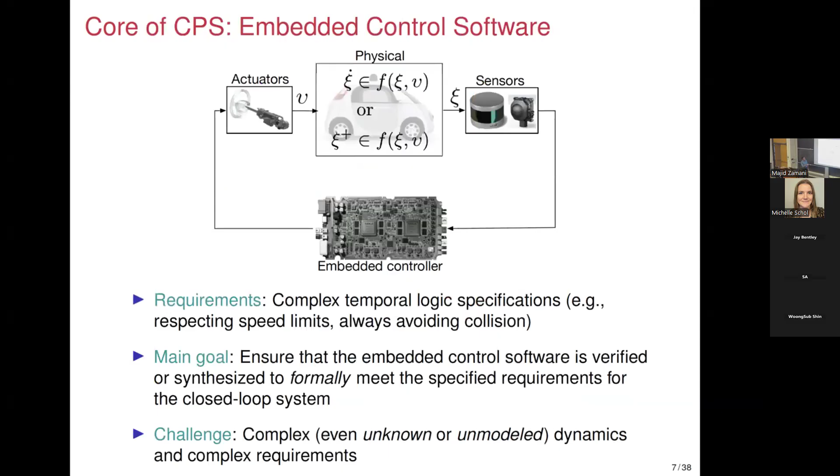Of course, for computing this so-called over-approximation of the reachable set, the whole idea in all these papers was, you have the map F, this map F here. The question is, what if you don't have it? How do you compute that object, the reachable set? Can we do it? The answer is yes, if you have some assumptions over your dynamic. By the way, there is no free lunch.

You cannot just say, I don't know anything about my system, but I also would like to provide formal guarantee. That doesn't work, right? You need to give me something. Okay, what is that? Give me some regularity property of your system. For example, it is Lipschitz continuous, right? That's enough for me. And give me some bound over that Lipschitz constant. I can use that information to actually build this finite system without knowing the model of your autonomous systems. I'm not going into the details. You can find the details in this paper.

But then you might say, what if I don't know the Lipschitz constant? That's okay. Give me nothing, right? I don't need anything. But then I don't give you 100% guarantee. I give you guarantee with some confidence, if you're okay with probabilistic guarantee. So now I say, rather than giving me the Lipschitz constant, do not give me anything. I can still build the finite representation of my autonomous systems.

But in this case, let's say I would like to design a collision avoidance software. What is my guarantee at the end of the day? I say, look, you will not collide with the obstacle with the probability of at least 99%. Of course, you can adjust the probability, 1 minus 10 to the power minus 5. If you're happy with that, then you use this method. If you want 100% guarantee, then you should give me something about your system. So it's now your call to pick which one you're happy with.

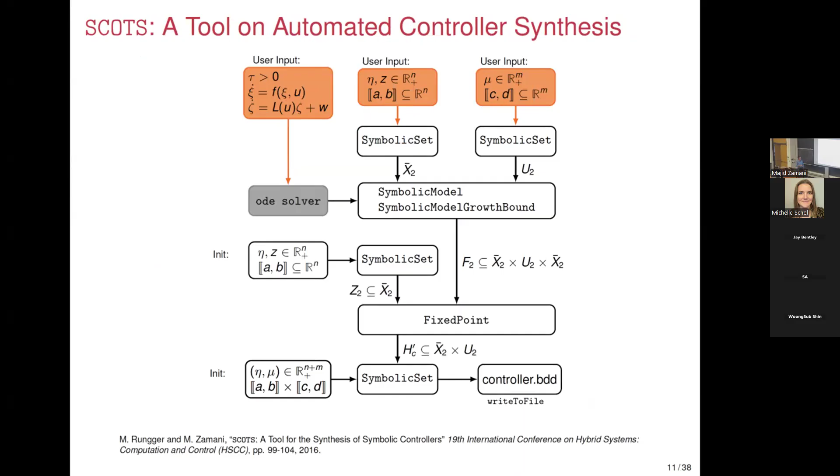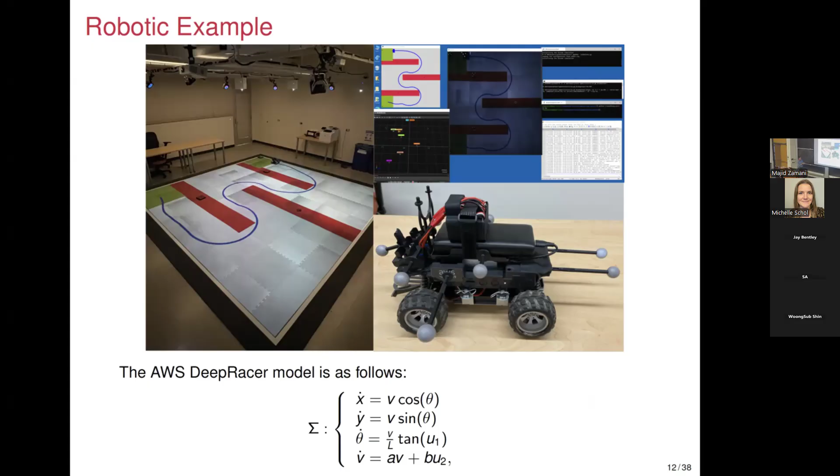So we have a tool where you can apply all these methods already, even if you don't know the map F, using data. And this is a setup we have in the lab. This is the model of this car. I'm not going to use the model for controlling the car. I'm going to use it to collect data, right? So that means I put this inside a black box. I can access it using data, but I don't use the map F explicitly.

Here, the car is supposed to go to the green region and avoid the red obstacle. And the student comes and introduces obstacles which were not introduced before. So the car is able to navigate in real time and choose the correct action.

Within one of our NSF projects, we started collaborating with Norwegian University of Science and Technology, UC Berkeley, and Hong Kong University. And they said, this is interesting. We would like to use this finite abstraction-based idea to control the docking of a surface vessel. They have a surface vessel in their lab, and they would like to use this finite abstraction, reachability based, even though we don't know the model. They wanted to apply it and see if it works. And this is the video: this vessel is supposed to avoid those obstacles, the yellow obstacle, and go somewhere there and dock.

So you see, it works as long as the systems are not very large in terms of dimensionality. We can use this machinery of computing over-approximation of reachable set, building this finite representation, designing a controller, applying the controller, and it works, even if we do not have access to a mathematical representation of the robot.

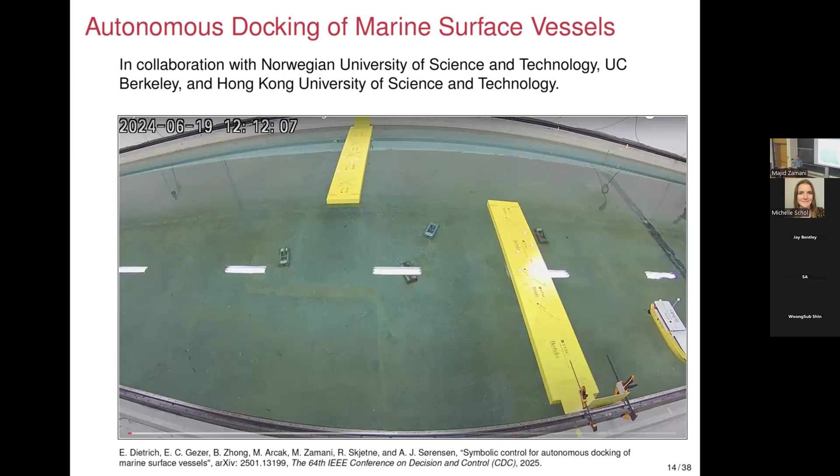Okay. Now the question is, this discretization of the space can be challenging. If you are dealing with a large scale system, you're going to suffer from the curse of dimensionality, right? How big of a system can you handle? Sometimes you might need like 10 to the power 12 discrete states. And now imagine the memory size you need. We realized this might not be practical all the time. For a small system, it's perfect. For a larger system, it might not be.

Do we have another proof rule for the safety verification? The answer is yes. I can use a function as a proof of my system being safe. I'm going to explain it very briefly. I'm given a system, which is a CPS, x plus equal to f of x, w, represented by this recursive map f. So now my question is, if my system starts in the green region, can I formally prove that it never goes inside the red region, right? Let's say the red in your context means colliding with the car in front of the ego car. So how do I prove that? And this is the dynamic of your vehicle.

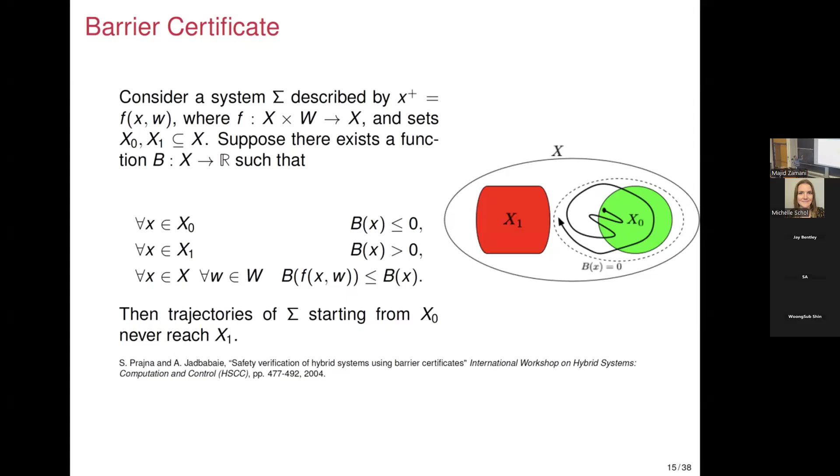Of course, I can also talk about design of the controller, meaning that in the case of collision avoidance, I would like to design an adaptive cruise control. So of course, there is an actuation involved as well, right? So you see only the last condition changed. The first two conditions remain the same. The last condition says for any state of my system, there should exist an input provided by adaptive cruise control, no matter what the uncertainty in the environment is, such that my function b satisfies this property.

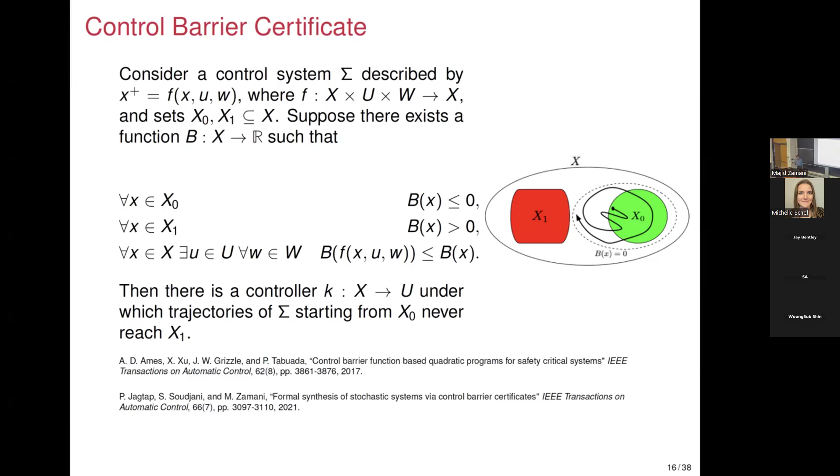So now in this case, if you can find a function b satisfying these three properties, you have a formally correct adaptive cruise control. Correct, 100%. So again, the formal guarantee or the proof boils down to searching for a function b. Again, to search for b, I need to know the map f, which I don't know, right? Does that make sense? If I'm able to find b, that means I have an actuation for my system that avoids my system colliding with the car in front. So, okay, now let's see. If I don't know the map f, how can I search for b?

What I'm going to do is cast the search for the function b as an optimization problem. I can always write it, right? It's not solvable, but still, let's write it. Solving this optimization is very challenging, because first of all, I don't know the map F, and this optimization has uncountably many constraints. Do you know why? Yeah, exactly. Your decision variables are q and eta, but you have an uncertain parameter x, and x lives in a continuous set. You have uncountably many constraints. The map F is unknown. Good luck with solving this optimization problem.

Let's say you are able to solve it, and if eta is less than or equal to 0, then the b that comes out of this is a valid proof of safety for your system. But now F is unknown. How am I going to do it? That's okay. What I will do is collect samples from my state set. So you see x now changed to xi for finitely many samples, right? Even though I do not know the map F, I do have access to its evaluation. Remember I said I can evaluate the system at finitely many points. So I do have that.

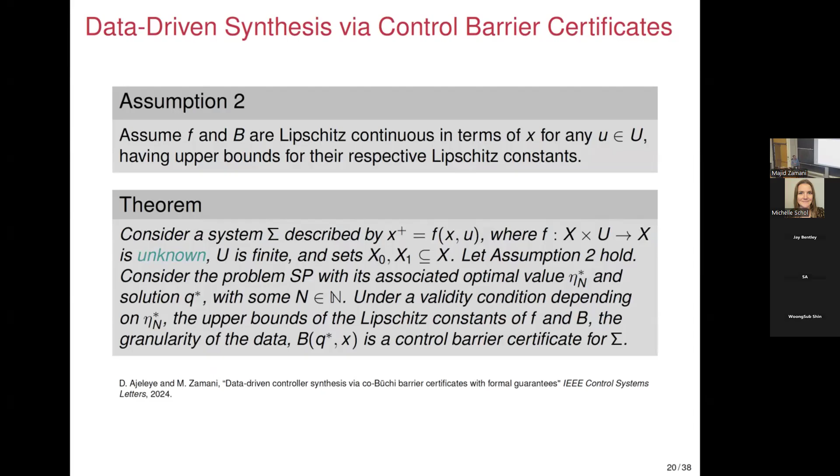Yeah. You still don't escape the curse of dimensionality with the Lipschitz constant; no matter what you assume, as the number of dimensions of your system grows, your number of cells may still be exponential. Yes, that's 100% true. And thank you for that, because I have a slide that comes to that. But here I try to somehow answer that, and I will have another slide to answer it even better. So what if I don't have Lipschitz continuity? I don't have any assumption about my dynamics. Can I give you something? The answer is yes.

I can solve this optimization problem, or let's say for the case of verification, this one, using finitely many n. You pick n yourself. Choose any n you are comfortable with. Solve it. You get an eta. Hopefully eta is negative, because if eta is not negative, that template of B is not good enough. But let's say eta is negative, and you chose the n yourself.

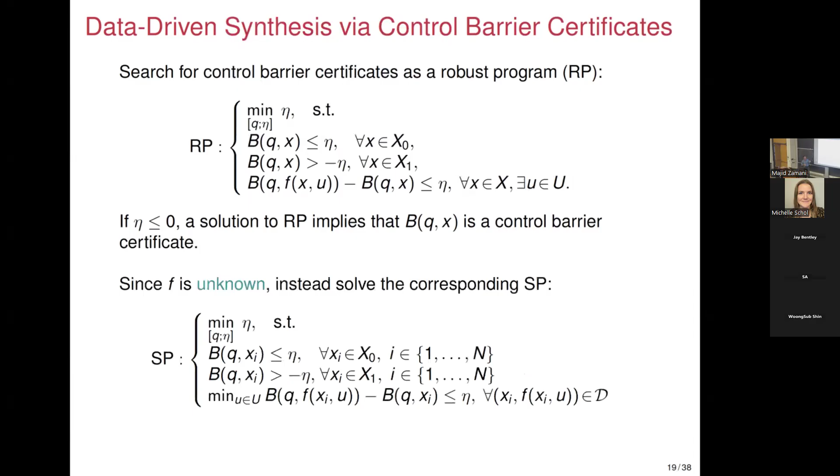Now, given that n, I can compute beta. Now I can tell you, your system is not going to have any collision with a probability of at least 1 minus beta. And that beta gets calculated using the number of samples you're using. The more samples, the smaller beta. The smaller n, the bigger beta. So if you want to have a very decent probability, let's say 1 minus 10 to the power minus 10, then n has to be very large.

In summary, you cannot escape the number of data points you need, right? So you still need to have a lot of data to be able to provide a formal guarantee, either in this form or in the previous form. Okay, now coming back to Shiram's question. He's asking, look, we are not escaping the curse of dimensionality, correct?

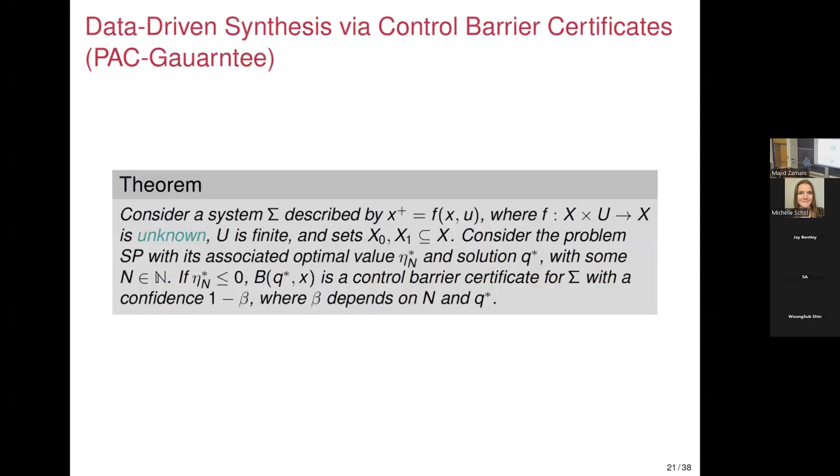Look, if you want to have a decent probability, 1 minus 10 to the power minus 10, and this is what the aerospace industry is using. This is the confidence they have. And look, based on the number of decision variables in your function B, look at the number of data points you need. Even with a probabilistic guarantee, you do suffer from the curse. You cannot escape the curse, unfortunately. You're stuck with it. But that's good, because human life is in danger and you have to do your due diligence.

Yes. So one way of looking at it is in high dimension, even if you have a small probability of not covering something, that accounts for a large volume as the number of dimensions increases. Exactly. So meaning if you want to, yes.

I'll give you an example. In many self-driving car companies, they are not using the best mathematical model. What they are using is called bicycle. It's a bicycle dynamic, a 3-dimensional bicycle dynamic. They call it a low-fidelity model. It's like a simulation, right? So they use that to generate, let's say, a feasible trajectory. And then they use a low-level controller to steer the car to follow this ideal trajectory.

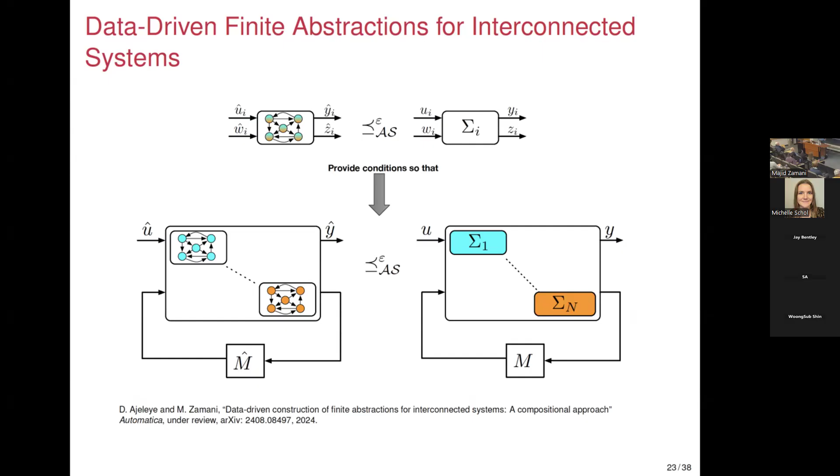So here is also in the context of data-driven. Here is an example just to showcase you can go to larger dimension if you take advantage of the structure. By the way, we don't know the model, even though I represent it; I just wanted to show you it's nonlinear. This interconnection map, it's max, but I don't know it. I can collect data, right? And then we are able to build the abstractions.

So, okay, now let's change gear. What if I utilize more structural properties of my systems, namely monotonicity? What if my system has some monotonicity property? You might say, what is monotonicity? Here, if this map F is monotone, what does it mean? For any x prime, w prime, if x is less than or equal to x prime and w less than or equal to w prime, that implies f of x, w is less than or equal to f of x prime, w prime.

If you do know your map F has such a property, you don't need to know the map F, you just assume it. I mean, many systems around us, in fact, do possess that property. Population dynamics, traffic networks, even smart grids under some operating conditions, you can assume that the system does have this monotonicity property. Okay, how do we use that?

Okay, first of all, this result says the system, which is monotone, is safe with respect to X1 if and only if there is a monotone barrier certificate, the function B. So this is an if and only if result. So now the search for the function B, if I know my system is monotone, boils down to finding a monotone function B. And now we can take that to our advantage.

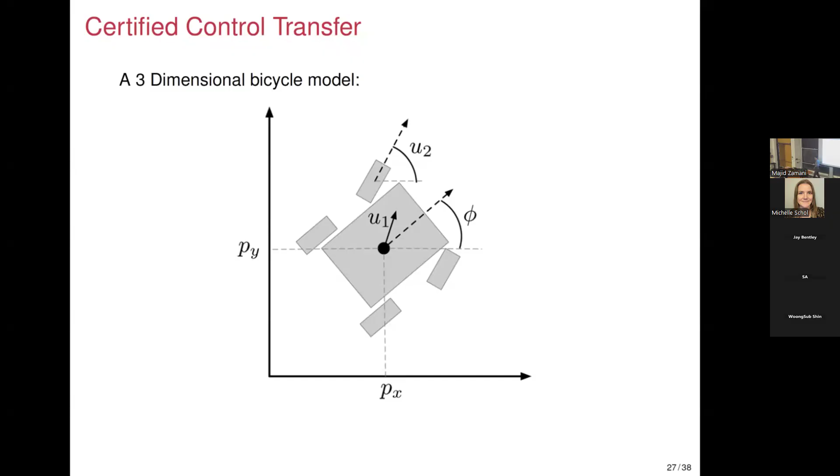To give you an idea, this is the bicycle model I told you people use in industry to come up with a feasible trajectory. Okay, I can use this to come up with a proof. Can I transfer it? And I can use my own tool, SCOTS, which we have developed in our lab, to come up with the trajectory for this simple bicycle model to navigate in this maze.

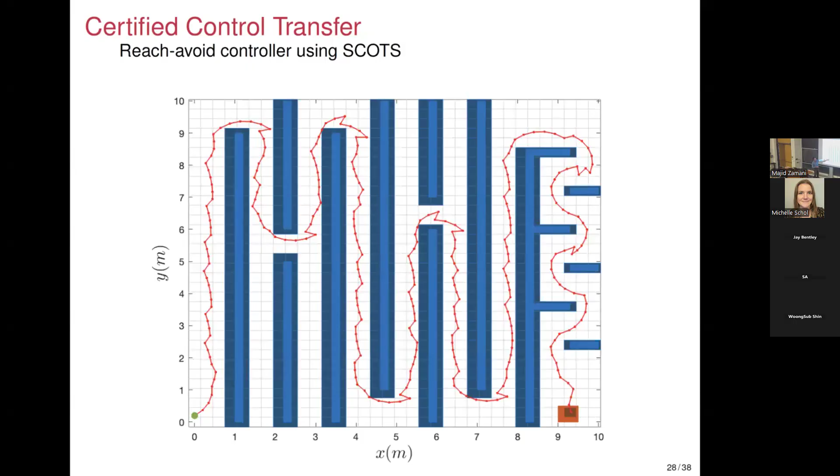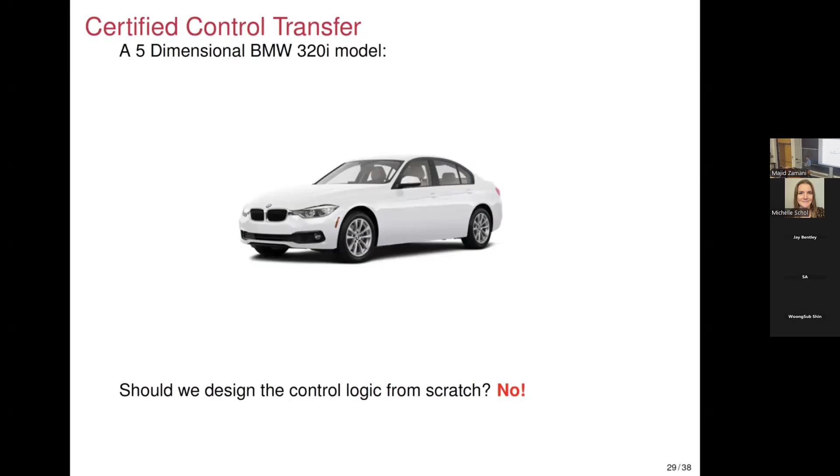Now I'm going to bring it to this car. I used a bicycle. Now I have an actual car. I have a trajectory for the bicycle with the proof. Can I transfer it to the car? Do I need to do everything from scratch, or can I actually leverage the proof I have done for the low fidelity model and bring it to high fidelity? And the answer is yes.

So in this work, we showed how you can transfer the proof of safety from low fidelity or simulation to high fidelity or the actual system. It's about transfer of proof of safety, right? We showed how you can transfer control logic, which is supposed to prove safety, like no collision, for a low fidelity model to an actual car. How do you transfer the logic with the proof? Like how do you transfer the software with the proof itself from one domain to another domain?

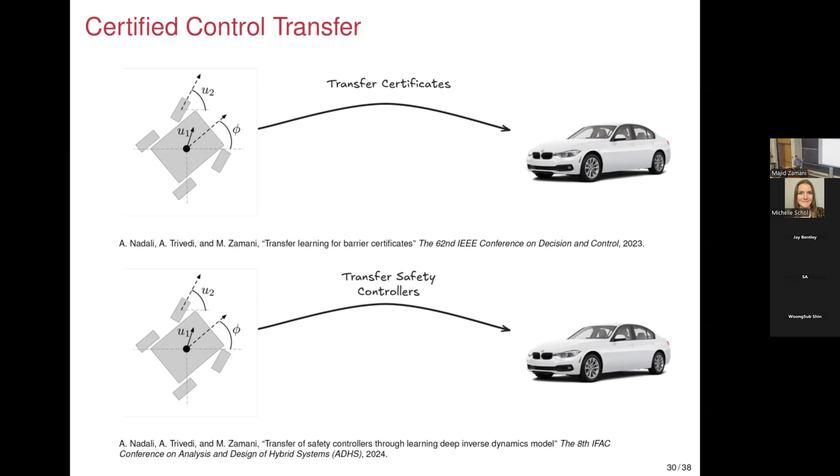And then we said, okay, what if the property is not safety? Can we do transfer of logic under any property, right? Just make it property agnostic, specification agnostic. And the answer is yes, we can also do that. I have a source system, low fidelity. I have a target system, high fidelity. And I would like to come up with the control logic for, we call it behavior transfer. Both of them are stochastic, uncertain.

So what I would like to achieve is this. I mean, this is very mathematical, but in English it says, if H is the output of my low fidelity, and H hat is the output that the high fidelity shows, I would like their behavior to be epsilon close to each other, right? Because you want your high fidelity to mimic low fidelity, because low fidelity comes with a proof. So if I'm able to show high fidelity remains close to low fidelity, I am good.

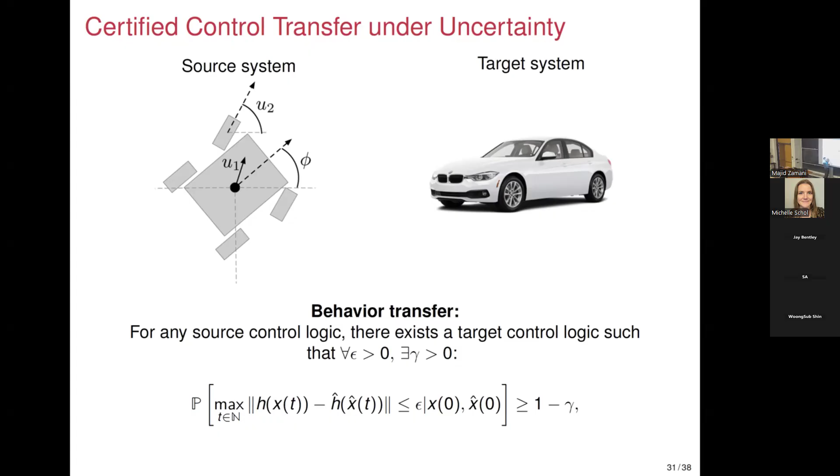But of course, because both of them are stochastic, I'm going to have a lower bound probability on that, right? I cannot show this with 100% guarantee. I show it to you with some probability lower bound. That's what behavior transfer means. And of course, to do so, we need to use some tools which have been developed already in the community. For example, this function V is called a stochastic simulation function that shows the closeness of two systems, and it satisfies a bunch of conditions.

But again, we hit the same wall. To find V, I need the dynamics, F and F hat, and I don't have access to those. Both of them are black box, right? So how do I search for V when I don't know F or F hat? I mean, same thing, right? The same thing that I showed in the previous slide, you can collect finitely many data points and you can train V. And you can also provide a formal guarantee, right?

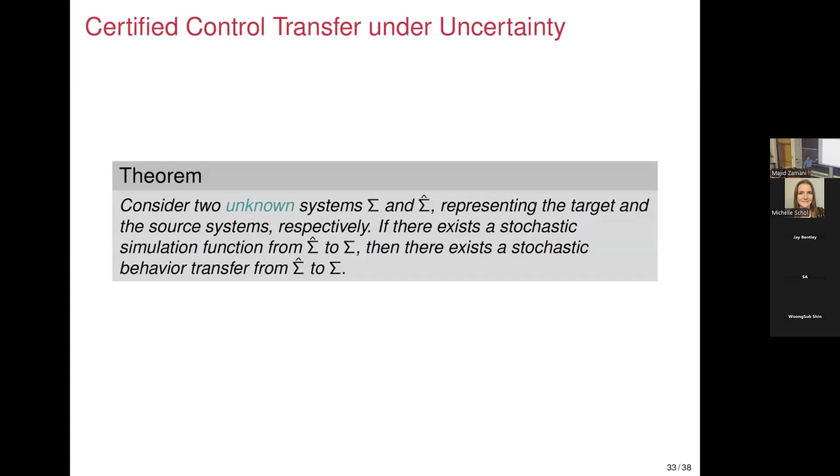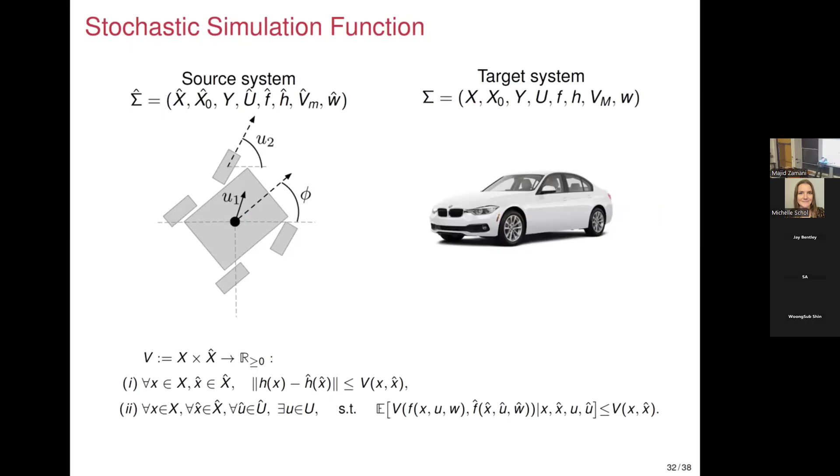I have two unknown systems, sigma and sigma hat, representing high fidelity and low fidelity. So if there exists a function V satisfying these two properties, that's a guarantee that I do have a behavior transfer. But how do I search for V? Because it requires knowing F and F hat, and I don't know them. But that's okay. You can now train a neural network, right? V can be a neural network. And how to transfer the control logic from source to target can also be a neural network.

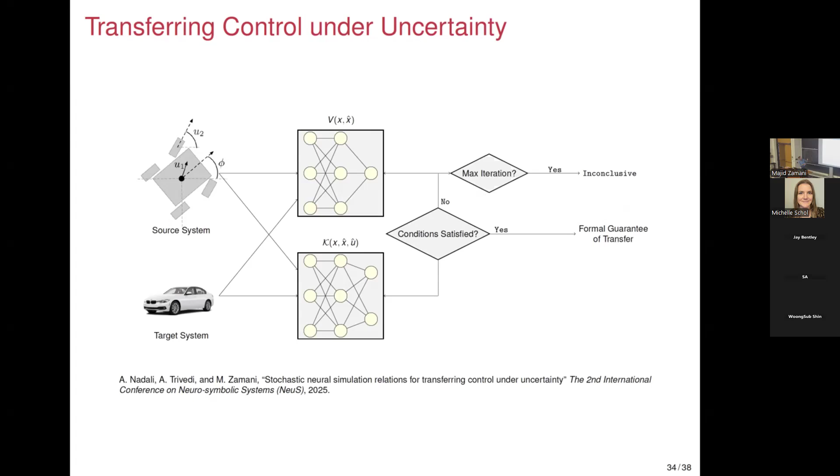And now you can actually put a condition, and this condition, you can guess what it is. Again, it depends on the Lipschitz constant, right? If the condition is satisfied, happy. Terminate, formal guarantee. You can transfer any control logic from the low fidelity to high fidelity. If the condition is not satisfied, you iterate and iterate. You retrain. Of course, if you reach maximum iteration and the condition is not satisfied, it's inconclusive, right?

This is what transferring control under uncertainty is. You train this neural network. It's like a translator. It translates control logic from low fidelity to high fidelity. It works as a translator. This neural network grabs the control logic from low fidelity and translates it to the high fidelity for you. And you have this guarantee at the end.

Okay, so now the last two slides about what I'm going to do in the future. This is what I'm very excited about. It's called accountable by construction. It's ethical by design of autonomous systems. And what do I mean by ethical?

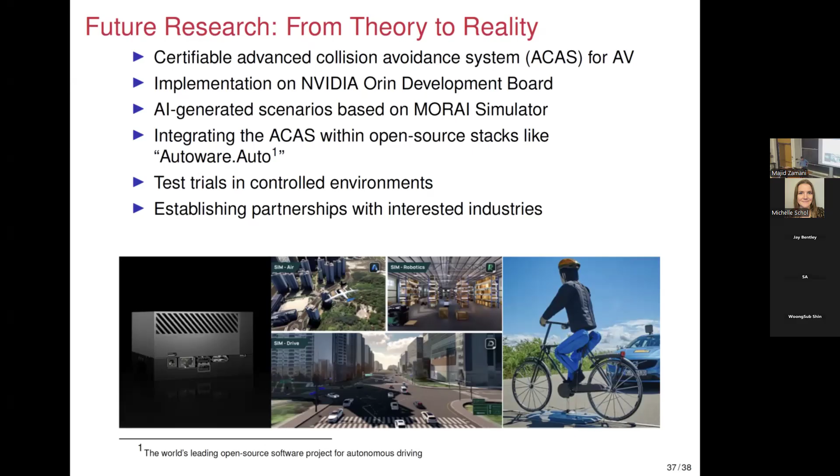Very interesting and clearly presented talk. Got time for questions? Yeah.

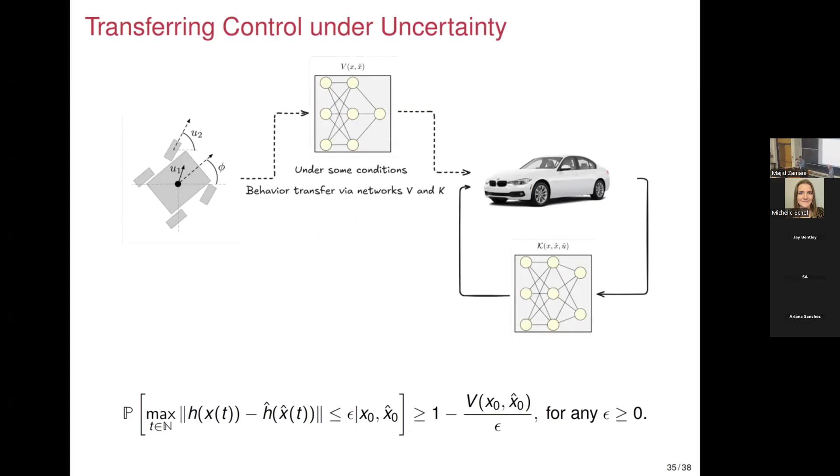You're training the neural networks for finding some function. Yes. Okay, as long as you tell me this function I can compute, I know it's Lipschitz continuous based on the architecture I am imposing, and I know an upper bound on its Lipschitz constant, I can use that in the training because I know my conditions. Because at the end of the day, I want to have a guarantee, right? And that guarantee boils down to some requirement in the training. And those criteria in the training depend on a bunch of parameters. One of them is the Lipschitz continuity of the neural network itself.

So if you want to change it with an LLM or any other model out there, you're perfectly fine to do it as long as you give me that ingredient: it has to be Lipschitz continuous, and you have to tell me the upper bound on its Lipschitz constant when you are training it. Then I use that in the training cycle. Does that make sense? Then I'm able to use it. In fact, we can use LP, we can use neural networks. Both of them work perfectly. Or you can use any other functions you want.

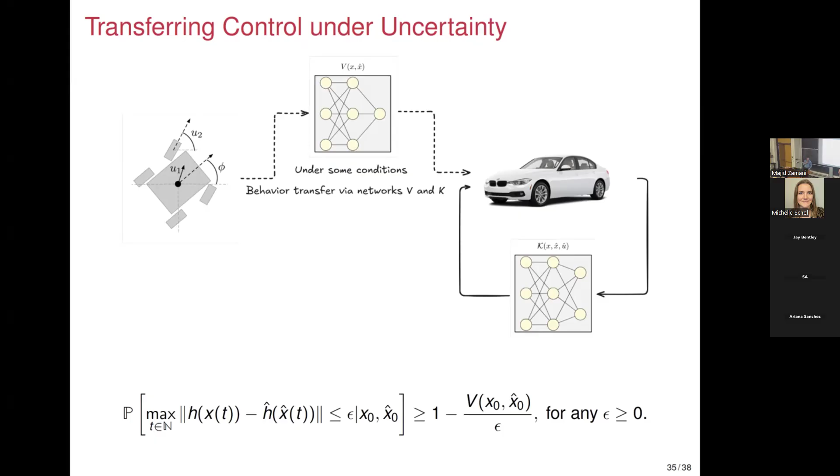Yes. About the example in your future work around age discrimination. This looks like interesting work, but on this example I'm a little troubled understanding what gets in that box, which is huge. Why, for example, does the model have any knowledge of age at all? I'll give you an example. Elon said we have to train an LLM. They're using all this information from human drivers, putting it in the cloud, and training this gigantic model which is supposed to control the car. So all the bias from the human drivers goes in there, and you're training a gigantic neural network which might favor some pedestrians over others.

Look at a pedestrian. It has some private features and public features. So any bias in current human drivers gets translated to that huge model, and it's going to be used in all the future autonomy of Tesla. So your question is, am I able to shield that bias? My answer is yes. I can put this accountable-by-construction layer on top of that gigantic model. Every time the action is going to differentiate pedestrians based on their private features, I kick in and give an action which makes them indistinguishable. Does that make sense?